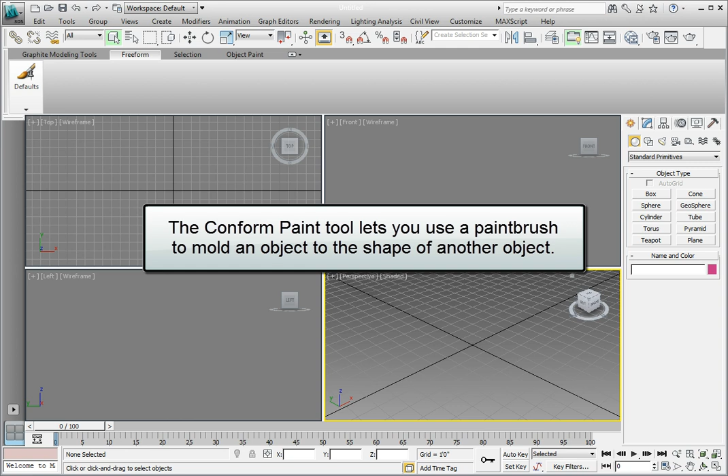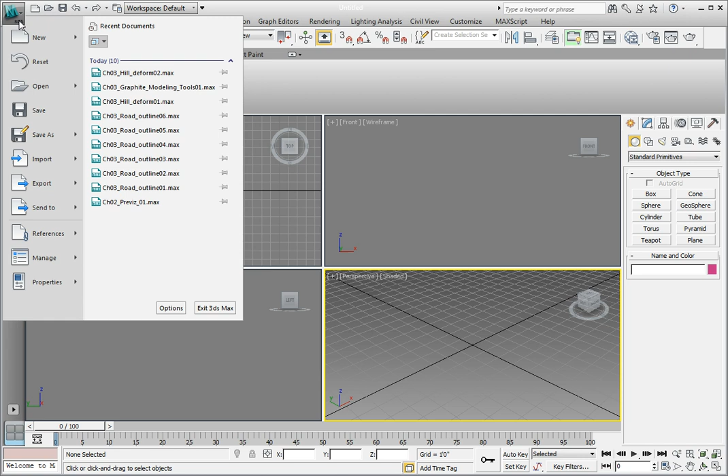In this lesson, we're going to generate a low polygon version of a high-resolution terrain mesh by using the Conform Paint tool to match the surface topology of the high-resolution geometry. In 3ds Max, click on the Application button in the upper left-hand corner of the interface. Select Open from the drop-down menu. Navigate to the Chapter 3 folder inside the Understanding 3D Project Scenes folder and open the file Chapter 3 conformpaint01.max.

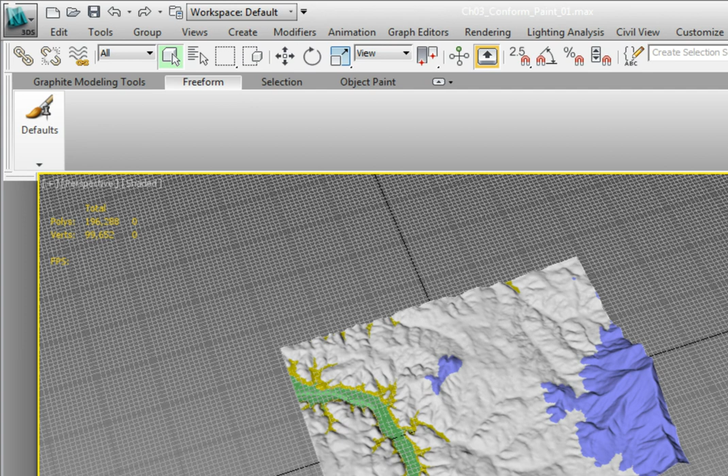When the file opens, you'll notice a fairly high-resolution terrain map. Go ahead and select the terrain object. If you look at the statistics in the upper left-hand corner of the viewport, you'll notice that there are two listings. I've turned on both the total and the selected object's polygon and vertex count. The terrain object has 194,688 faces. While this is not a tremendous number of faces, it far exceeds the 1,600 face limit we have for creating this terrain as part of a real-time application.

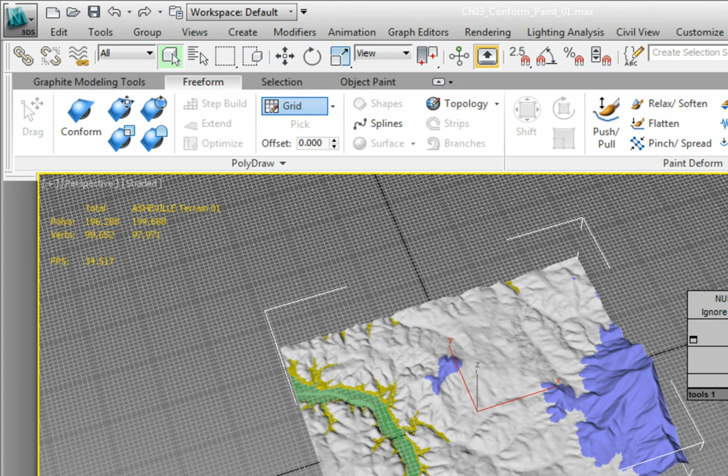In the viewport, right-click. From the Quad menu, in the upper right-hand quadrant, choose the Unhide All option. This unhides a simple planar rectangle that contains 1,600 faces, exactly the number we need for our low polygon model. Click on the plane object to select it. In the Command panel, click on the Modify tab. This will bring up the Graphite Modeling Tools ribbon. From the Graphite Modeling Tools ribbon, click on the Freeform panel. We're going to use the Conform brush that's located on the PolyDraw panel of the Freeform tab.

Before we can begin using the Conform brush, there's a few things that we need to set up. In the PolyDraw panel, click the down arrow to the right-hand side of the Grid option. From the drop-down list, click on the Surface option. Click the Pick button in order to select the object that we're going to use to conform to. After clicking the Pick button, click on the high-resolution terrain located beneath our low-poly object. This now sets the high-resolution version of the Asheville terrain as our designated Conform To surface.

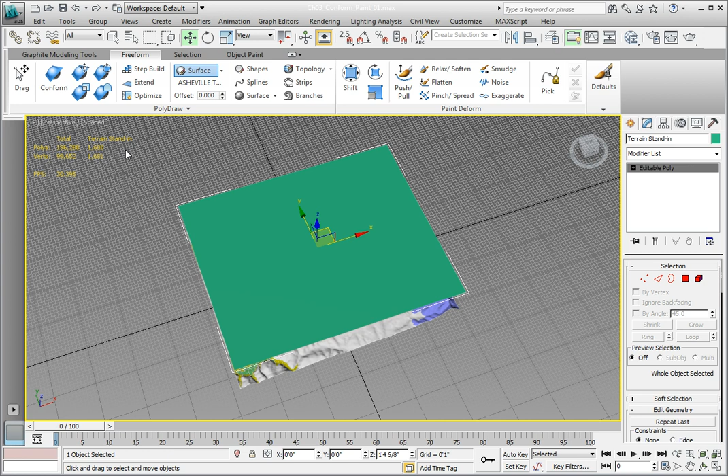Make sure the low-poly terrain stand-in object is selected. In the PolyDraw panel, click on the Conform brush. Notice that the floating Conform Options panel is now visible. There are several options available with these floating options panels. If we put our cursor to the right-hand side of the panel, you'll see two small icons appear in the gray sidebar. The top icon allows us to place this panel into the ribbon. The second icon changes the orientation of this panel.

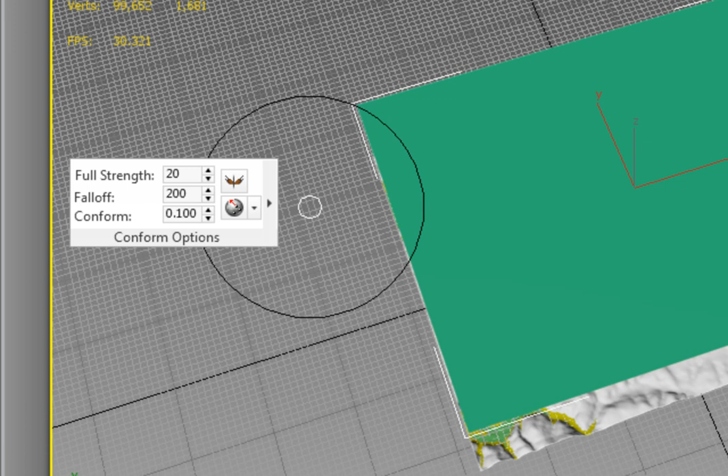Currently, the orientation is horizontal. We can tell this when we click on the arrow located on the right-hand side of the panel. You'll notice that the panel expands out to the right. To close the panel, click the vertical bar to the right-hand side of the open panel. Put your cursor back over the Conform Options panel. Then click the Toggle Orientation option. This changes the orientation to vertical. Click on the down-facing arrow at the bottom of the Conform Options panel. Notice that the additional options now open beneath the panel instead of to the right.

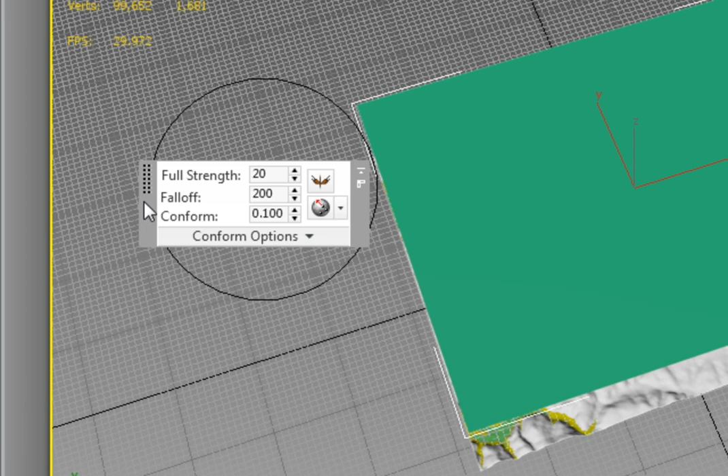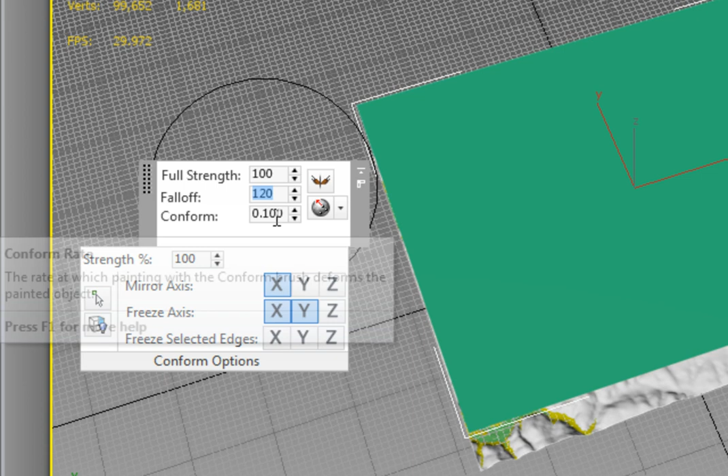Let's make some changes to the Conform options. We're going to freeze both the X and Y axis. In the Freeze Axis option, click the X and the Y axis options. Make sure the strength percent is set to 100. Let's change the full strength brush size. Go ahead and type 100 into the full strength value and press Enter. Set the fall-off value to 120 and then press Enter. We want to set the conform to a value of 1. This will make sure that the conform brush moves all the vertices of our object all the way to the surface. Type 1 into the conform value and press Enter.

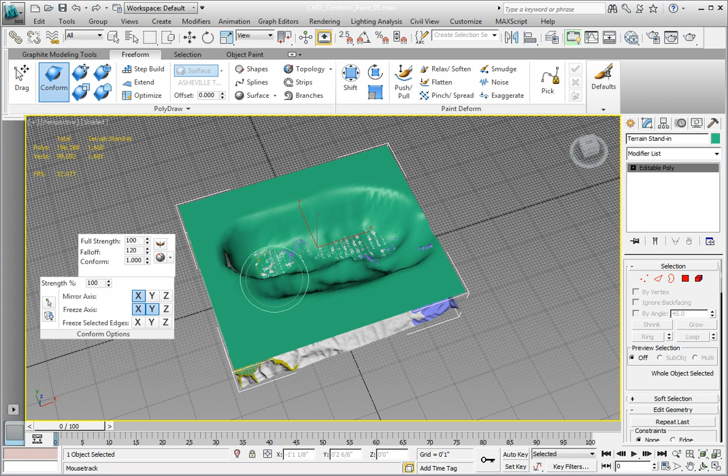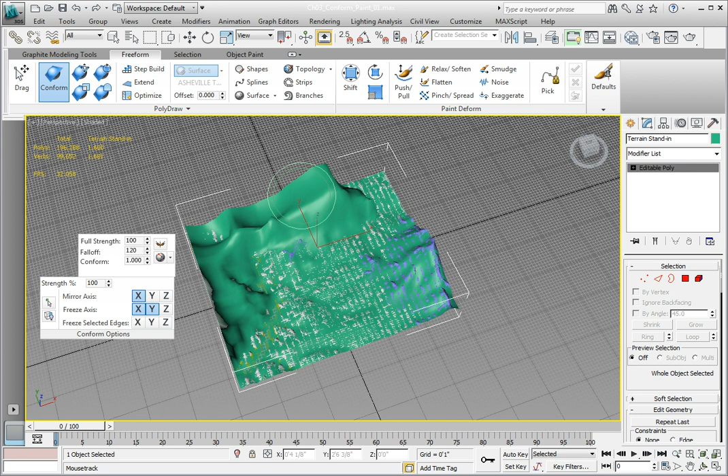In the viewport, click the low poly terrain stand-in object and move the brush back and forth along the surface. You should see the geometry of the low poly object conforming to the high resolution surface beneath it as you brush. You may have to go back over spots more than once. If you just do one quick brush, it will not go all the way down to the surface. This tool is an extremely helpful tool when you bring in models that have been created in other programs and have a very high number of polygons. It allows you to draw a low polygon object and mold it to the shape of a high polygon version.

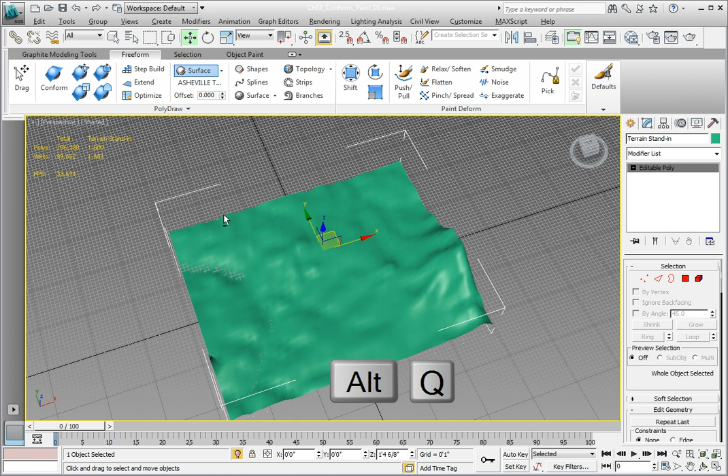Once you've finished conforming the surface, click on the Conform option in the PolyDraw panel to turn off Conform Paint. If you want to see the results of the Conform Paint in your low poly object, press Alt-Q on the keyboard to isolate the terrain stand-in object. You can see that the stand-in has taken on the shape of the high-resolution object and is only using 1600 polygons. Click the Exit Isolation Mode button to exit isolation mode.

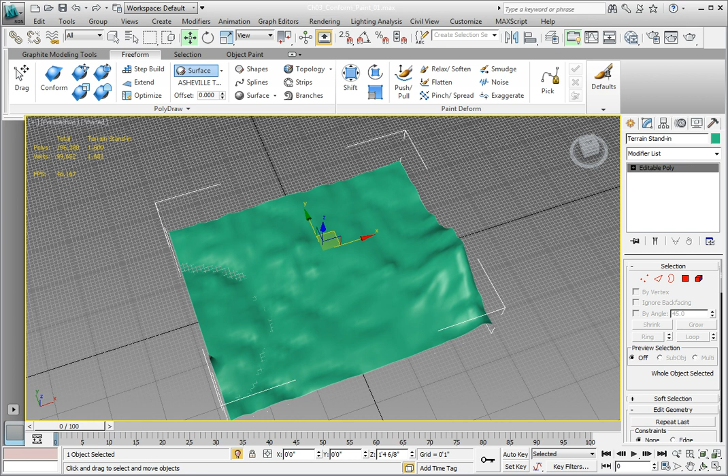Click on the Application button in the upper left of the interface. Click Save As from the drop-down menu. In the Save File As dialog, click the plus in the lower right-hand side of the dialog to increment this file on save. If you're asked to overwrite a file, go ahead and overwrite it.